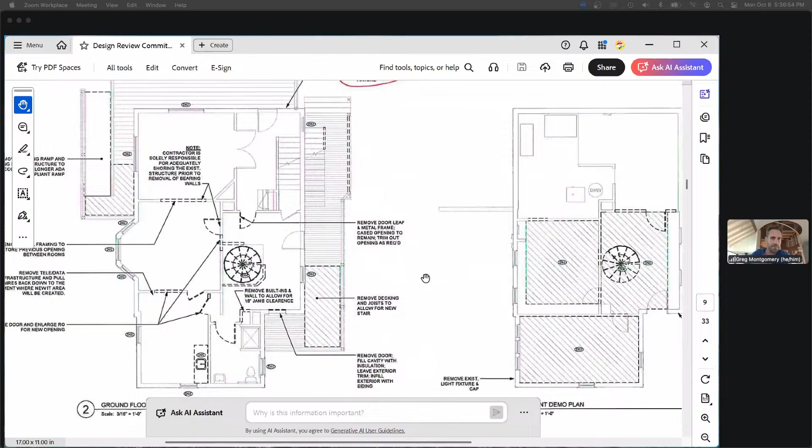Sure. The exterior lighting for the proposed renovations fell through the cracks a little bit as we went through our building permit, and we moved one of the means of egress to the exterior. That needed to have a certain exterior light level to qualify for a means of egress, which is what prompted the outdoor lighting sort of review. And yeah, this is a good enough place to be for now.

Thanks, Meredith. So once we started reviewing it, for site safety and for egress and access, it just seemed like some lighting updates should be made in general all throughout, not just in the sort of means of egress that we had been initially looking. So this amendment to our zoning permit addresses exclusively, I think, outdoor lighting in this one.

So what we're proposing is a number of fully shielded fixtures. The street facing porch, part of the already permitted work is revising the ADA ramp. That's all the way to the north. There's not really any lighting over that point of ingress or egress currently. So we're adding some light fixtures in the ceiling of that main porch to provide a sort of basic low level illumination to get around to that ramp and to the front door.

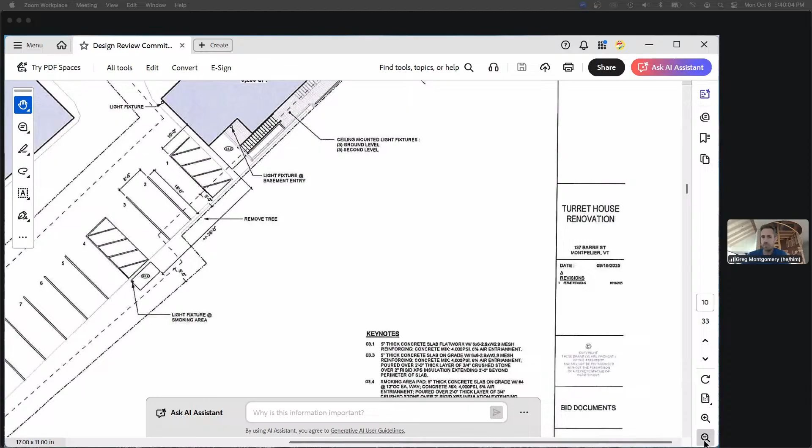What are the wall fixtures? Don't you have some wall fixtures by the front entrance? Yeah, so it's just one of those typical ones. It won't be silver. I think we're doing the bronze fixture to tie in better with the existing colors. Okay, thank you.

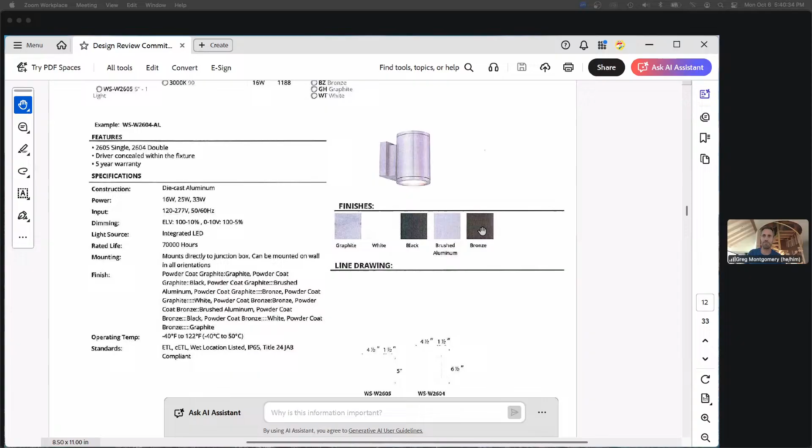And then related to the other permit we'll talk about next - if you go back to the site plan quickly, Meredith. We're proposing a light fixture for the little smoking area we're creating, again just to provide a feeling of safety and basic illumination, so when it's dark out people can get there and be encouraged to use it rather than smoking in the bathroom or something like that.

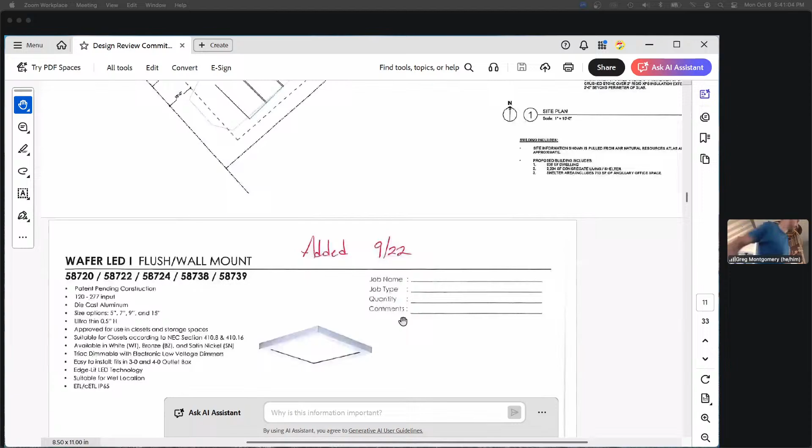Can I see that there is a sheet for landscape lighting? That's the one we just talked about. Yep, that's the one - that bollard style fixture. That will be the back one going by the smoking area, correct. Yeah, it'll be mounted - it's a bollard type fixture that'll be mounted to the little concrete pad we're proposing back there.

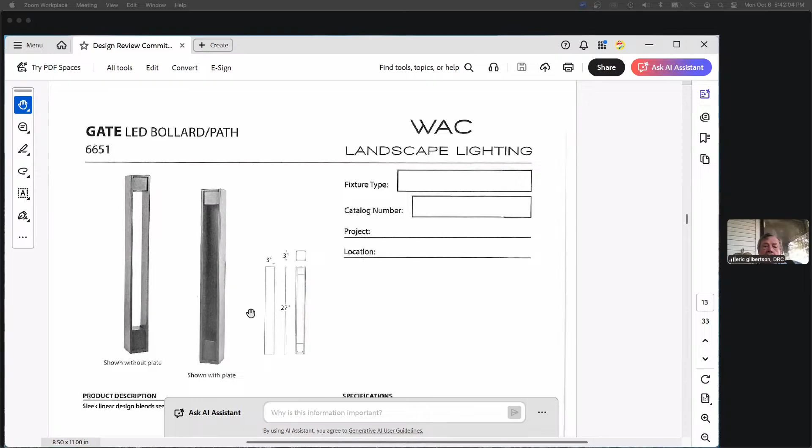These fixtures - I'm not sure I have a problem with this, but they look to be really modern fixtures rather than more traditional fixtures. I think that smoking one is fine, I don't care about that one, but I wondered about the recessed lights and the other door light - it's just a really modern fixture.

Yes, it's more contemporary. It's a light I use on a lot of projects. It's shielded and down-facing, so it usually doesn't run into problems in terms of dark sky compliance and that sort of thing. Aesthetically, you're right, it's definitely a bit more contemporary. I think you're correct, yeah.

Yeah, this is Liz - I was also thinking the same thing, that something more traditional could be more appropriate for the age of the building. But nothing too much, just something simple, but I like, of course, the downlighting.

Can I make a comment, Steve? Sure. About the rule requirements - just as a note, the zoning regulations, outside of design review, make it a lot easier to have fully shielded, fully downcast lights. If there's light going out sideways above the horizontal at all, the amount of total lumens allowed is a lot smaller.

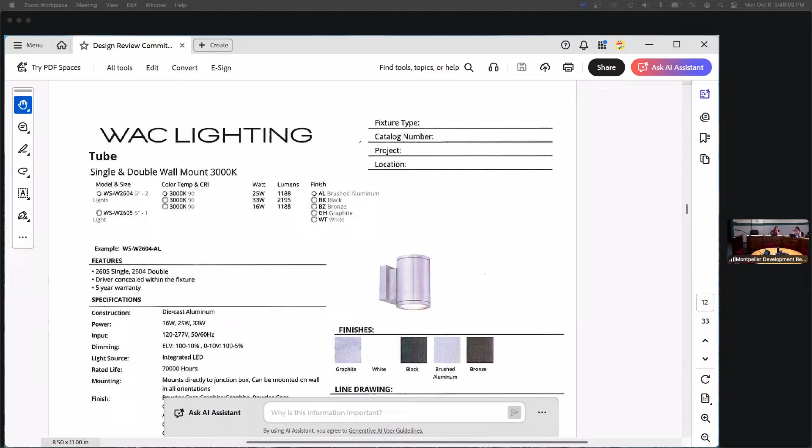Well, so it sounds like Steve's offering you the option. So you could choose to go with that alternative, but if it's an option versus a recommendation, then it doesn't become a permit requirement. It's just, it gives you choices.

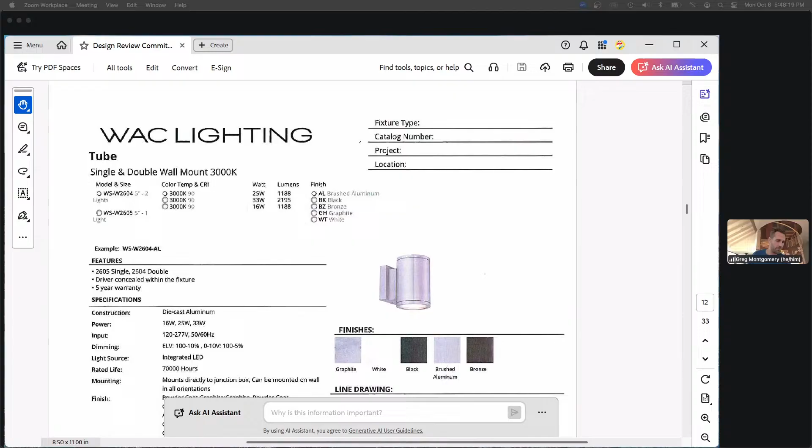Okay, I would raise two other things that are important. One is the programming of this project, and durability is really paramount. The second is the project timeline. Our backs are very up against the winter, and this is obviously a critical infrastructure piece for cold weather. So whatever we can do to try to avoid extending the ability to close on financing with open permits and that sort of thing, I would like to. I'm not saying one way or another, those are just the two other pieces of context I wanted to raise.

This is Eric, I'm in favor of the alternate, but would insist that the fixtures be a dark color, which shouldn't really change. Was the proposal for the dark bronze color? Yeah. So either the dark bronze or the black would be suitable as far as color goes, because most of the historic fixtures on buildings you'll find are either one of those colors, probably more dark bronze than black.

And again, would leave an alternative for a downlit fixture. The other advantage for this particular location is that the downlight LED gives you a little more spread, as opposed to, and it depends on where the bulb is located in the tube. If the bulb is located up in the tube, it gives you a limited spread down below, whereas the LED through a glass globe gives you a wider spread, again without any additional light above the horizontal.

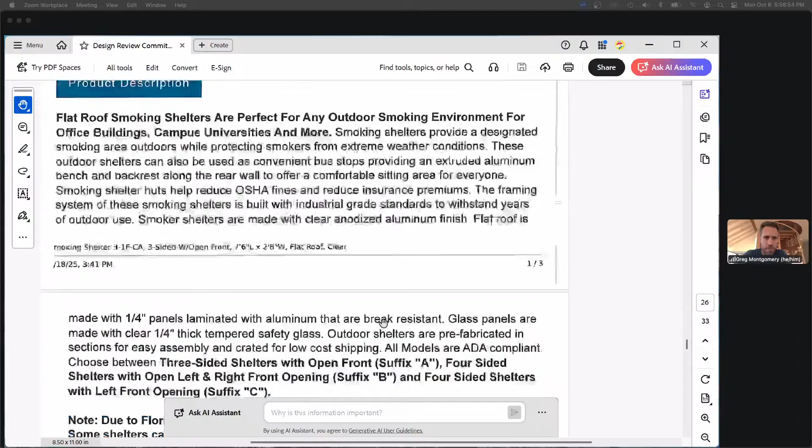As part of this, there would be a small concrete slab to mount a prefabricated smoking structure, to provide shelter and encourage residents to actually go outside to smoke. We've already talked about the lighting for visibility and safety.

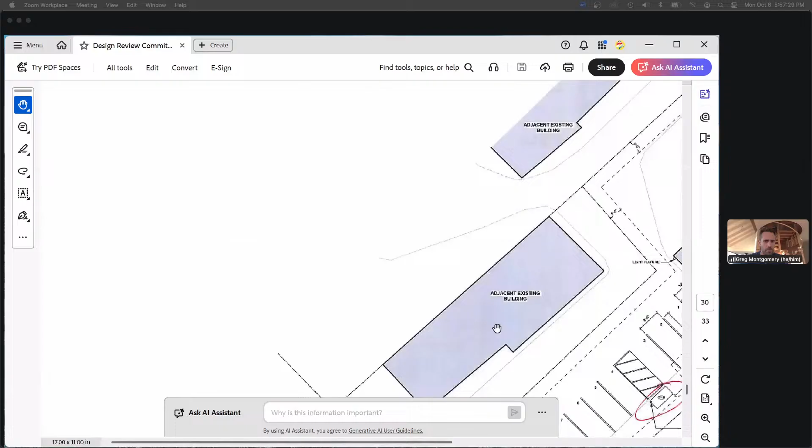How close is this, Greg, to the bike path? You can go back to that site plan, Meredith. I don't have a dimension shown there, but it's roughly... 35 feet off of the building is the dimension I've pulled. So from the building to the smoking shelter is about 35 feet.

So to the back property line, we're looking at least 60 feet probably at a minimum, I would think. And where Meredith's cursor is, is that the bike path? I think that's the railroad. Well, yeah. It's in that area, I don't know exactly what relation to the property line, but it's in that back area.

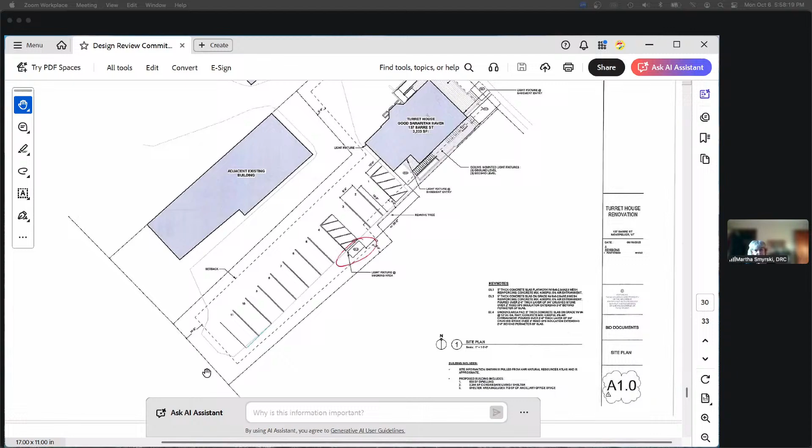Is there a picture of the proposed shelter? So I'll pull it back up. Hold on. It's before the photos... there's not a picture of it in the location, but before that. Are you in the right packet?

Okay, and I'd like to state a personal preference: I wish it was a dark color also instead of shiny silver. I would need something else, and maybe that's possible, I don't know.

Yes, we can look into painting it. I don't know what the pre-finish options are. If there is a color, it's clear anodized. So yes, we can look into a paint option also, or have it site painted.

That's very much a preference, especially with the dark fixtures.